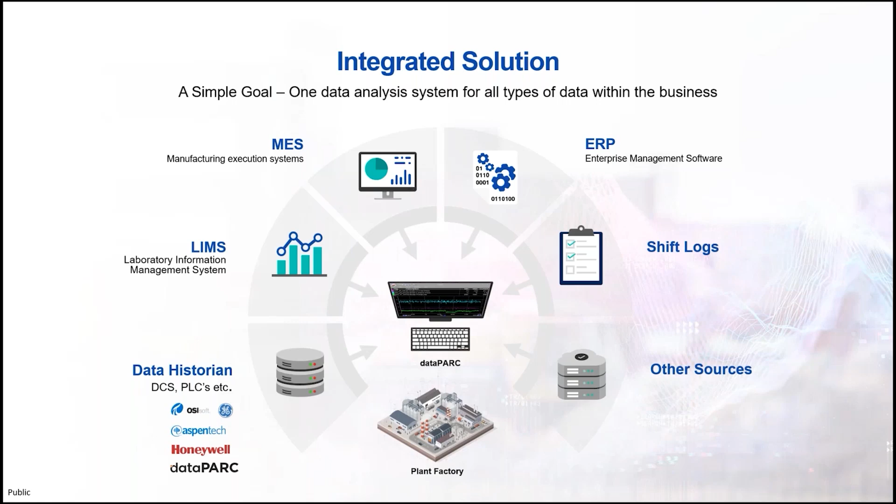A fundamental goal of dataPARC software is connectivity, basically being a single window to all of the relevant data at your site. dataPARC is a source agnostic system, meaning that you don't necessarily have to have the dataPARC historian. So you can be connected to the dataPARC historian, a different historian, connect also to your LIMS, MES, ERP, and even other data sources. Say you have a web connection and you want to be able to take in temperature or humidity and view all of these in a single normalized view via trending or graphics, just via drag and drop.

Finally, what are the dataPARC benefits? You can integrate multiple data sources, which really reduces cost. You're using your existing sources, no double storing, and removal of data silos. Once you have this seamless access to your information, dataPARC provides industry-leading, easy-to-use data analytics tools. Most of them are just a right click away. This provides you with the power to answer all of your questions with just the one tool. It increases your efficiency, no time wasted looking for information in other departments, and it increases collaboration and ownership of the process.

So now that we've had a quick introduction into dataPARC, let's get into it.

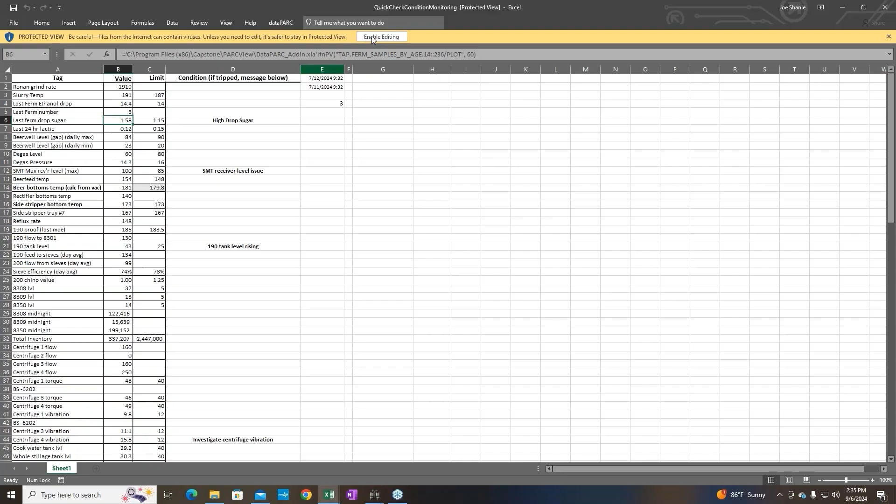So what we really did was develop a fairly simple spreadsheet where we put some of our favorite tags, things that have happened or things we know the operator should be looking at, in the left column. When we open this spreadsheet and hit enable editing, it would start to pull some of that data real time. That data gives us real information as to what happened, and we can put a control limit of where we think that value should be.

This at least gives the operating crew the opportunity to go down this column and talk about some of the things that might be going on. In this particular example, we're just coming up out of a shutdown, so we have a lot of interesting things to talk about at shift change. This is kind of what the process looks like and the way things are going here.

So the operators would come in for shift change and would be able to explain, maybe we have a high drop sugar, the beer well was a little full. Again, we're coming out of shutdown, potential for a roof landing - we're just starting to fill that tank after doing some work on it. But it lets them have a lot more in-depth conversation around what's going on in the plant within that real short handoff.

I have to give the caveat here, there's a lot of things showing up on this list, but we're coming out of startup, it's kind of a new condition. So it will definitely give you a lot of messaging, but a typical day for us, maybe 2-3 of these light up in a day. One of the things we wanted to avoid was having way too many of them give an indication and become a nuisance, something people avoid. So being very thoughtful about where you set those limits is very important.

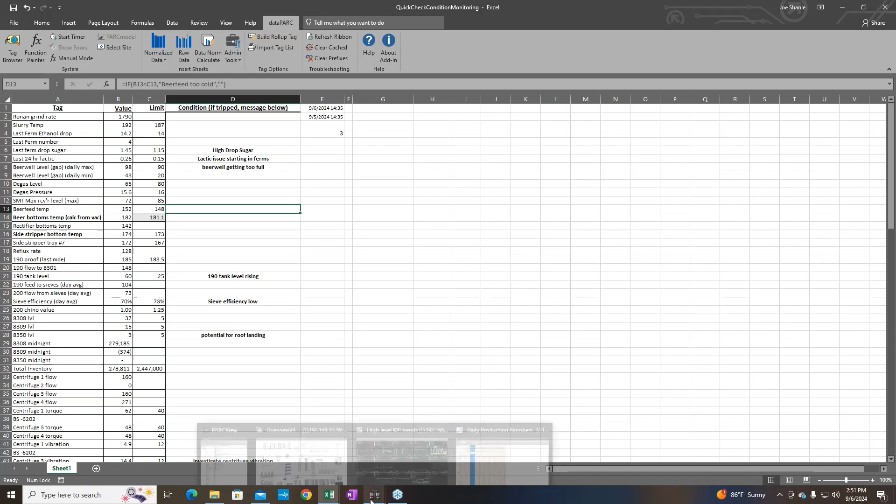It's interesting, we do use this feature. If I go back to our previous conversation, I generally leave the plant about 5 o'clock, but at 6 p.m., 9 p.m., midnight, 3 a.m. and 6 a.m., this report automatically emails to me. So if I wake up in the middle of the night wondering how the plant is doing, I can grab my phone and look at that right from my email. So we do use that feature to some degree, but we aren't using it necessarily for our daily production reports.

Data silos were a significant issue, with values being stored in Excel, limiting data entry and access to just one user at a time. Can you talk about the impact of integrating data into MDE with respect to the silos and limited access?

Yeah, I think that was a common occurrence around here years ago, where we would oftentimes call around and ask someone to close out of a spreadsheet so someone else could enter their values in. Those problems have all gone away. If it's a number that we input to a spreadsheet, one of the first questions we ask ourselves is, is there a better way, and can we input this data into dataPARC directly so we can just query it as needed?

It was a little bit of an interesting learning, but we started here and got very good at querying numbers. But one of the things we realized about a daily production report is there may be numbers out there, but someone wants to always know the story behind those numbers. And I think one of the things we've come to admit to ourselves is that the footnotes are probably as important as anything in the report.

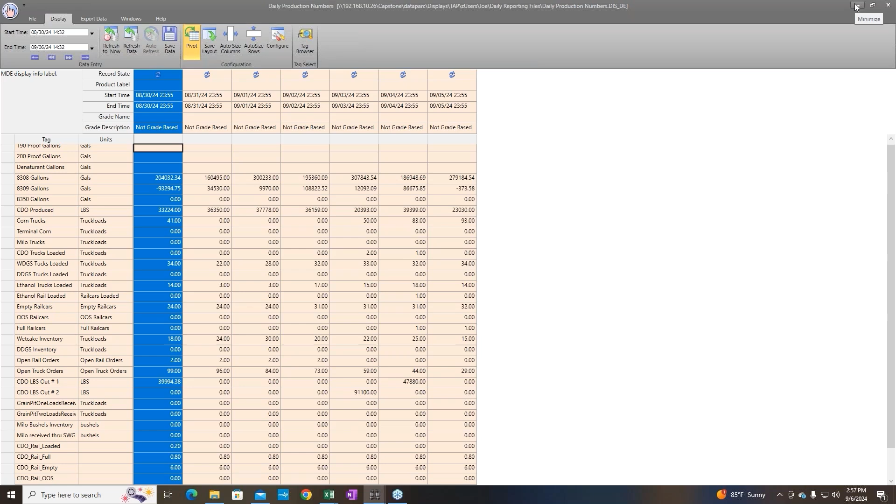What kind of data did you move into MDE? Was it only lab data? You mentioned that people commented values in these MDE reports as well.

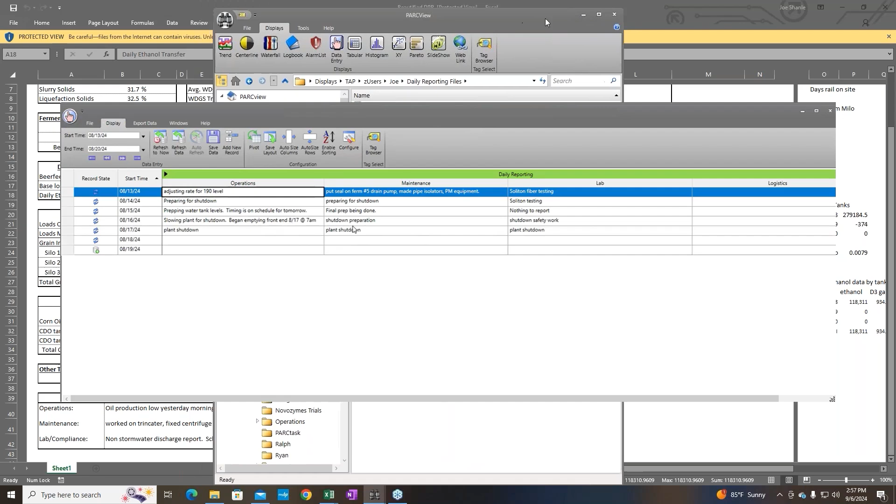Yeah, so we have another MDE sheet, our daily comments, which you saw at the bottom of the Excel spreadsheet. It's significantly smaller, but it's an MDE sheet that looks very similar. Instead of putting in all numerical data, they can just type comments in to try to explain why things were the way they were for the day.

So I know one of the great pluses about MDE is that data's all backed up to the database, and that multiple users can view or access the MDE at once. So you don't have to ask people to shut off or log out in order for you to enter something in. Were there any other benefits you saw after moving data from Excel spreadsheets to MDE?

One of the things we were finding is that a lot of data was being copied and pasted from one spreadsheet to the next, and we could end up with transcription errors. But it seems so much more efficient having all of that data centralized in one place, then just pulling it out for whichever report we're looking for. So I'd say first it did add ease for spreadsheets, but two, it probably helped us a lot more than we even realized with the accuracy of our data.

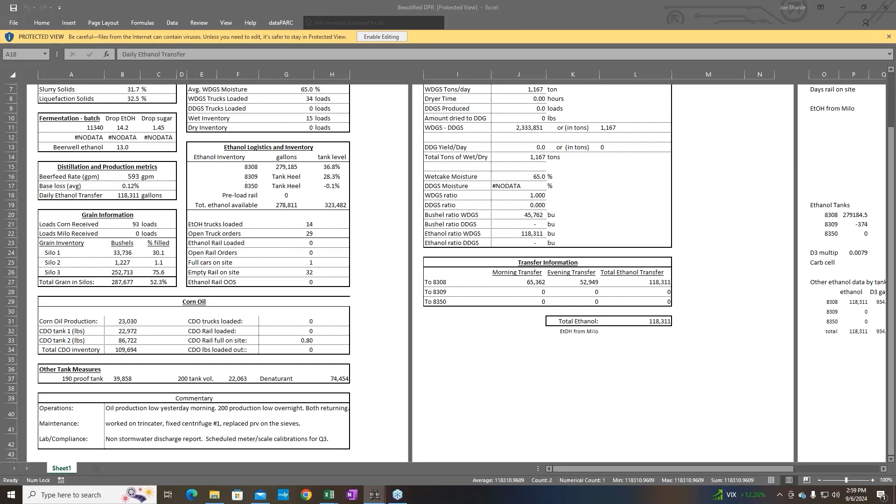Well Joe, I've really enjoyed all of your great examples. I don't know if you have any other small tips you guys might be utilizing PARCview for that you'd want to share with us.

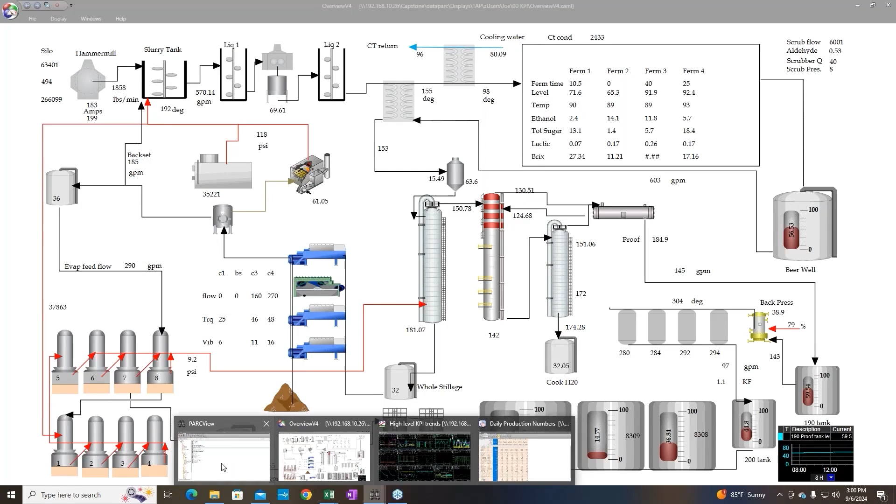But to go back and answer your question, Anna, I think one of the things we've done that's a little different is we never really found a good place to store a lot of our drawings and standard operating procedures across the plant. So I'll move this over so it's easier to see, but the operator is going to be in dataPARC anyway, and this made it very easy for them to get into the dataPARC server and access an SOP whenever they want to use one.

And we're actually finding that since we're all in this server pretty much all the time anyway, we're finding other kind of interesting variants to use there.

Another one that we're using—I think it's this one to open—we actually have a point cloud for the plant. This allows us to use it for training purposes, or if we have a web meeting with someone, we can talk more specifically about what's going on in the plant. So we can zoom in and look at what's going on, take measurements across the facility, that sort of thing.

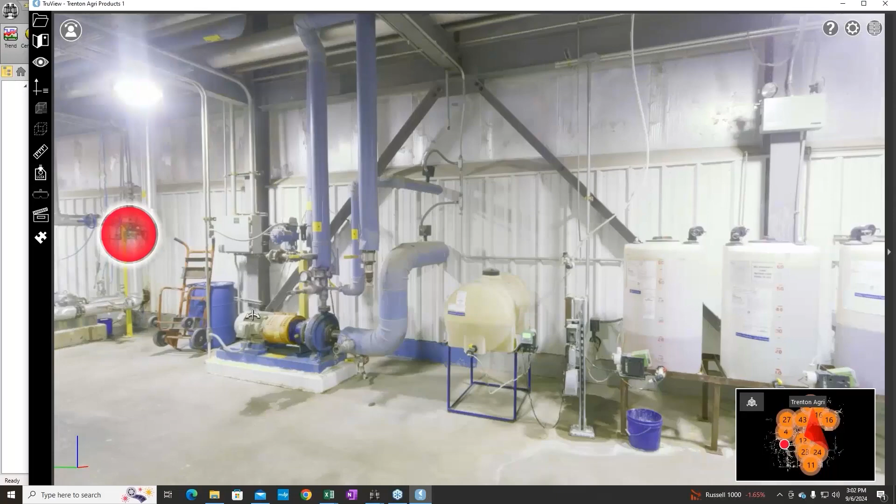And lastly, one of the things I'd like to talk about that I think is unique to the use of dataPARC is the way we use it for our maintenance rounds. We've brought a lot of thermography in-house, so a lot of our equipment that we'd want to take an infrared scan of, just to understand a bearing temperature, an electrical connection temperature, or the temperature an electric motor is operating at—we've created MDE tags for a lot of those sorts of things.

So even our maintenance folks are engaging with dataPARC so we can collect that baseline data and look for a shift in the temperature a motor is operating at, or a bearing, and just try to make ourselves a more reliable organization overall. dataPARC has been really the best tool we've found to work with that. Otherwise, a maintenance technician looking at data could normalize a deviation if the temperature on something went up slowly over time. But once that data point is entered into dataPARC as an MDE, we can trend those sorts of things.

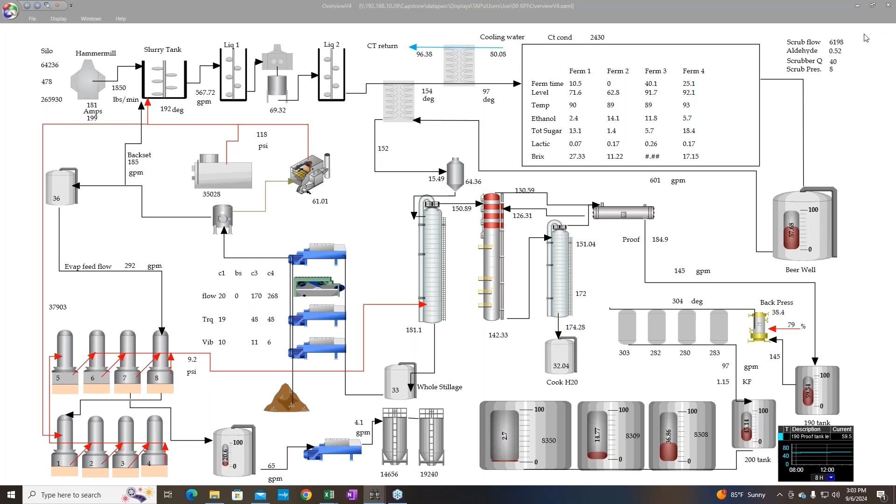I think it's time for us to jump over and see if people have any questions. Thank you both so much for that insightful presentation. Excited to dig into some of the questions we have here. To get us started, I have a question for Anna: What makes dataPARC a good solution for ethanol producers?

Anna? Can you hear me? Yes, I can hear you now. My apologies. Thank you. No problem. Okay, so what makes dataPARC a good solution? I was talking to myself here. What makes dataPARC a good solution for ethanol producers?